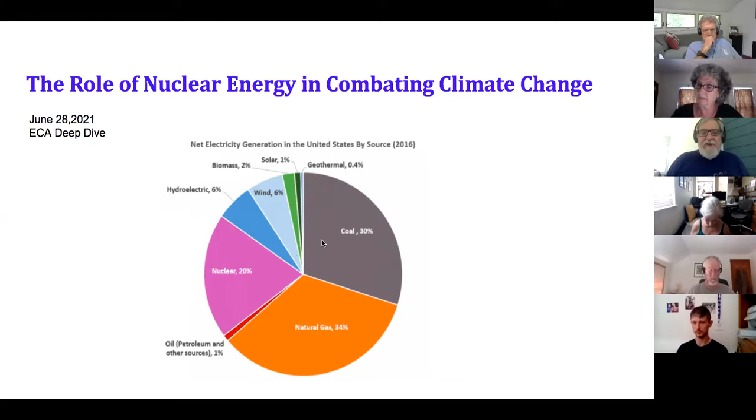At our last chapter meeting, Senator Barrett spoke to us. For those who don't know who he is, he's among the leaders and perhaps the leading climate advocate in the State House. He's introduced many bills, and he's also the chair of the Telecommunications, Utilities, and Energy Committee, so has a very influential role.

When he spoke to us, he said he had been anti-nuclear at one point, but that he's had a conversion. Basically he said it's because the climate goals are going to be incredibly hard, and there are going to be tough choices ahead to use every clean energy source we can get, and that we just can't afford to be purists. His experience is that when we shut Pilgrim down, it set us back a year. Well, it turns out it actually was worse than that, because we lost half our clean energy when Pilgrim got shut down, and we have not yet recovered from that.

Anyway, looking ahead, he thought we have to make sure we don't prematurely shut down Seabrook and Millstone, and then we have to be open to new technologies such as small modular reactors. So those are points we'll be talking on, and I thought it was a good intro that he gave us.

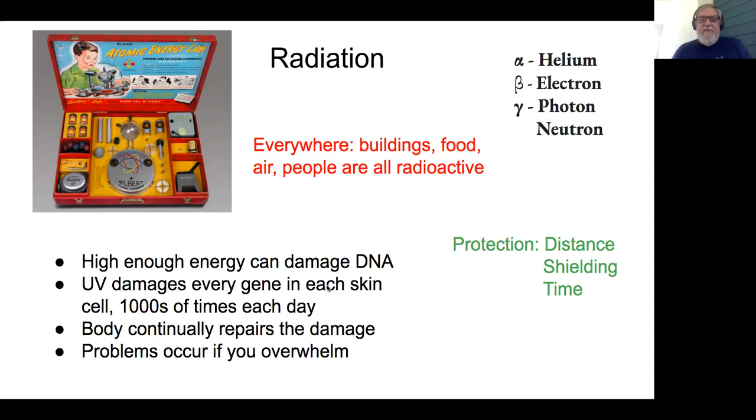So normally everything's okay, but if you've ever overloaded our system and gotten a sunburn, that's an example of what happens. So the problems are if you overwhelm the repair mechanisms, and it's the same with radioactivity as it is with UV light. You'll get a burn, you get more, you'll get things like moles, you get more, you'll get tumors, you get more, you'll end up with cancer. So it's deadly, but only in doses that are high enough to overcome our repair mechanisms.

So where's this radiation all coming from? Well, 84% of it is just naturally occurring, radon gas coming up. There's some from our food, some from cosmic rays, buildings give off radiation, and we get a lot of exposure from medical procedures—dental x-rays, CAT scans, things like that. If you add together all the things people are concerned about—nuclear testing, nuclear accidents like Chernobyl and Fukushima—you end up with just 0.3%.

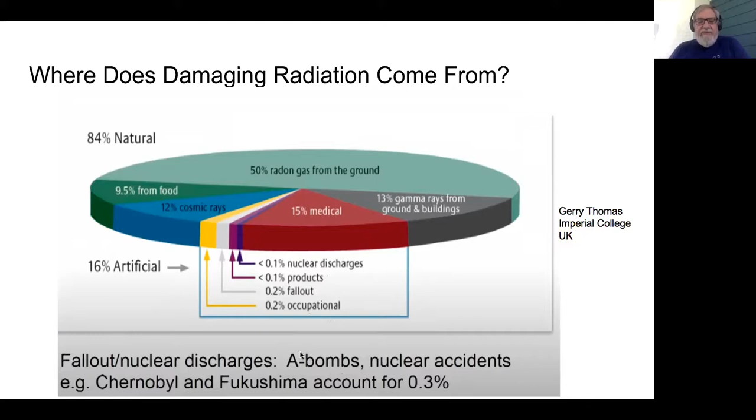So I want to talk a moment about dosing, because the dose is what's making it dangerous. It's like drugs in that respect. This is a log scale, so it's factors of 10 for each demarcation. The heights don't mean anything. And it says sieverts, which is a measure of lethality.

If we look at the responders to the Fukushima accident, they were a little under 1, and there was only one death, so that fit in also. As you get down to 0.1, we're getting to where the body is able to do repairs generally, and where the radiation dose is about what one would get in 1 year on the International Space Station. The effects on longevity—I put in here what the effects of living in Boston are because of PM 2.5. So we're in that range.

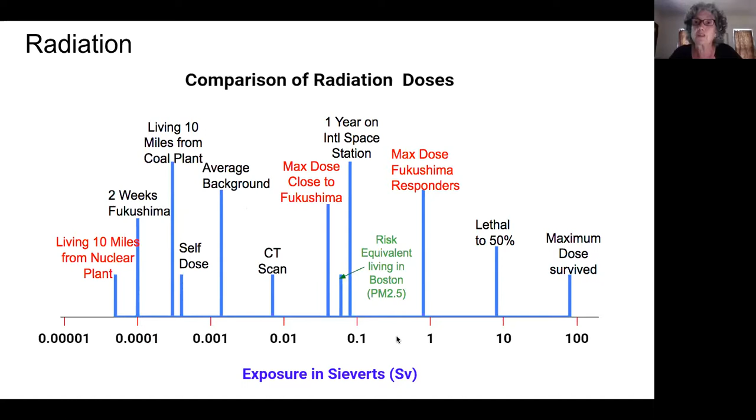What is PM 2.5? Those are small particles, usually from diesel emission, things like that. Even roads might put some up. Small particles in air pollution cause lung damage. Boston actually has very good air, but that is one of the things we do have, and we're actually right at the safe level. Those are the big killer from coal. We'll see in a moment that nuclear is not the killer; it's coal, and it's those small particles.

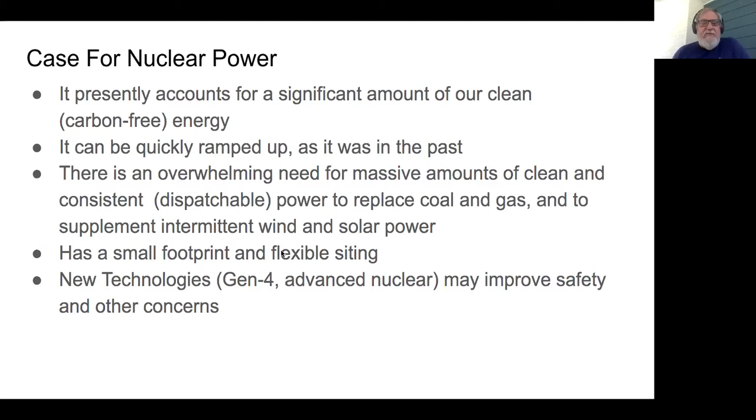Another of its advantages is it has a very small footprint and flexible siting, so I'll get into that. And then lastly, there are these new technologies referred to as Gen 4 advanced nuclear, and hopefully those will address the concerns that people continue to have. So anyway, my first point was that we're already using a lot of nuclear—it's already a big part of our clean energy portfolio. I'll say carbon-free and clean energy interchangeably.

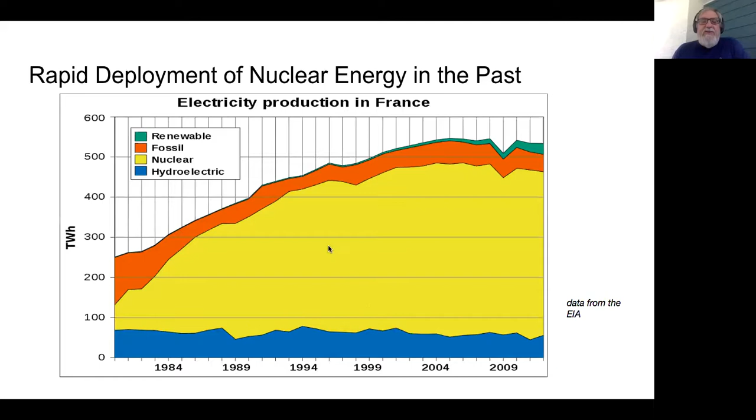Specifically, this is looking at France. France actually was a little bit later on that, so it was like 84 to 94, but the yellow shows the nuclear generation. You can see it just took basically a decade for France to very largely replace its fossil fuels.

And it's not just France, many other countries have done this. This graph shows it takes a decade of the peak scale up of different energies. We see Sweden was the biggest example in terms of scaling up nuclear very largely and very quickly, then France and 9 other countries, before we get to how quickly countries have been able to scale up the renewables, wind and solar. So historically, it's been nuclear, not the renewables, that countries have been able to largely replace fossil fuels with.

This data goes to 2014. I looked up more recent data, and the more recent increases in solar and wind are comparable to what's shown here, on the order of 80 to 150 kilowatt hours per capita. So as much as we're hoping for wind and solar, it's not happening at the speed at which in the past we've been able to do nuclear. So that's one argument: historically, when we've needed or there was desire to replace fossil fuels, we were able to do it with nuclear.

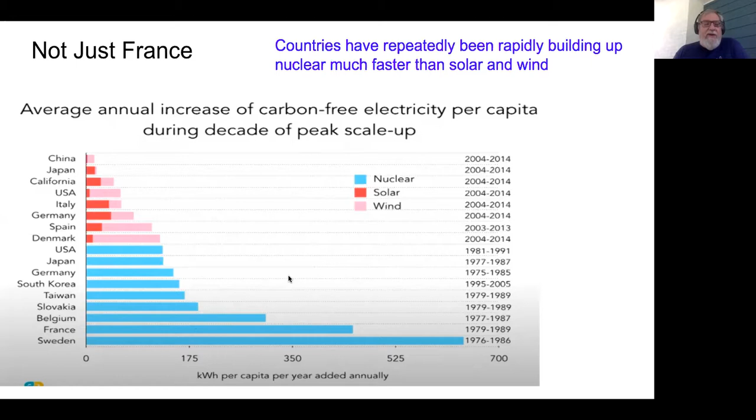The hope to combine the renewables with batteries requires storage for each of these time periods. The minutes and hours we can handle right now with batteries and other things like perhaps pumped hydro. We can probably get up to days, but there really doesn't seem to be anything on the horizon that looks affordable for the longer periods of time.

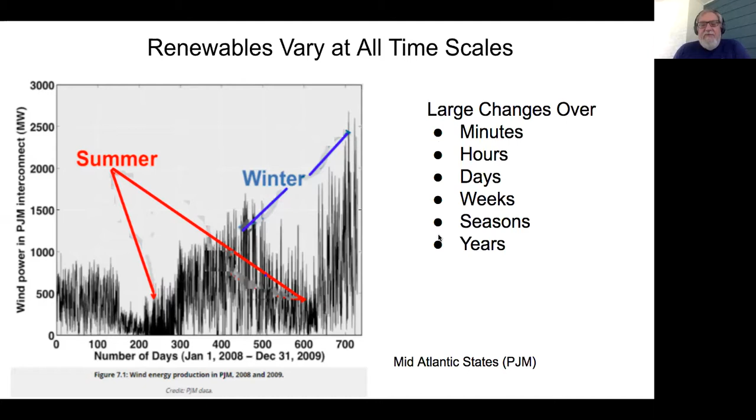If we look at electrical energy generation, it involves 3 different classes. There are the renewables, and their big strength is that the costs have been coming down, so that's an advantage. But as I just showed you, you can't depend on them. They may not be there—they come and go, and the amount varies.

The next category is what's known as flexible baseload. This is energy that can be just turned on when you need it. It's there, you can depend on it. You can vary it, tune it up, tune it down, and it's consistent. There are several terms for this: firm energy, dispatchable energy, baseload energy. The point is you can just turn it on and modulate it, tune it up and down—it's steady and dependable. That's why baseload is used for a reason; it's the base of our energy.

The third is the fast burst, and that's to make up for the way the load changes and makes up for the variations in renewables. That is mostly peaker plants, although batteries and other things can make it up. But the more we're dependent on or the more we use renewables, it's been lately the experience that the more fast burst is needed, and most of the fast burst has been gas peakers.

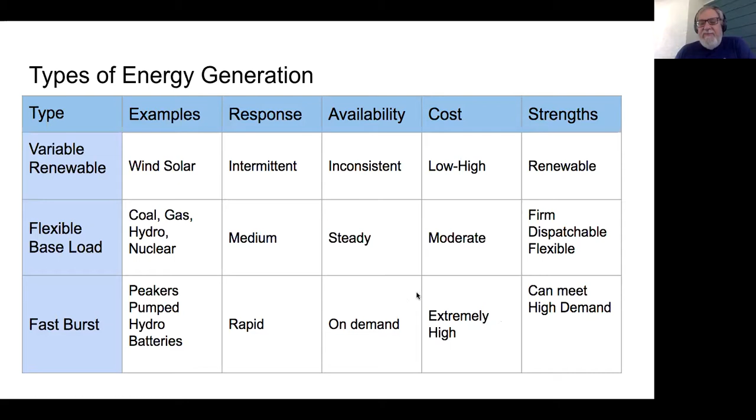So this is probably the second main argument. The first, I thought, is the rapid adaptation you can do with nuclear, but the second is this replacing the role of fossil fuels as dispatchable firm energy.

We can look at two countries. Yep, well we're at about 10. Okay, thank you. We can look at two countries.

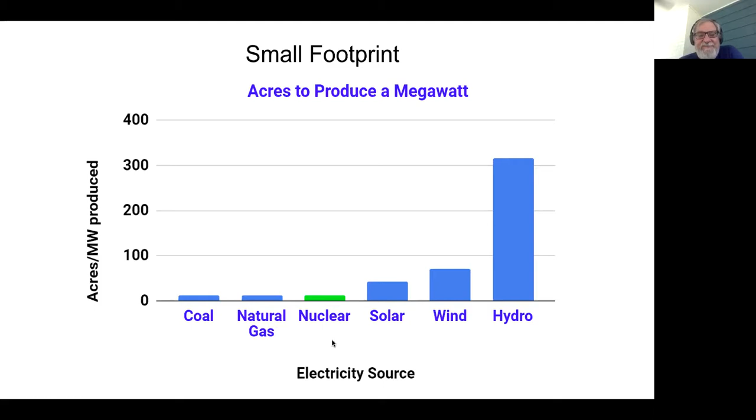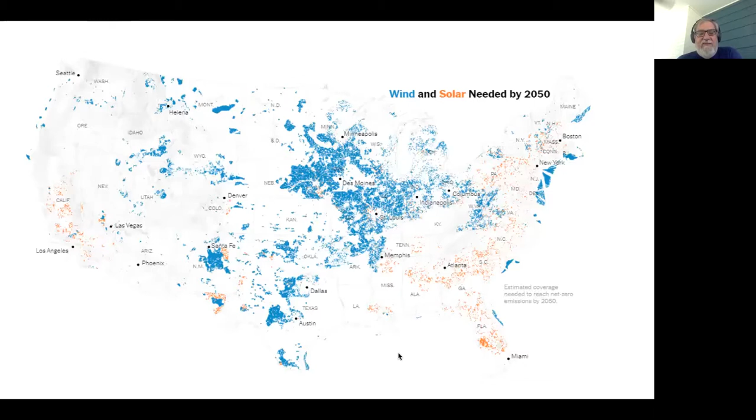And the last point in nuclear's favor, probably surprising to at least some people, is that it actually has the best safety record.

One reason is a lot of deaths come from mining. Nuclear has about a million-fold higher energy density, so there's not much mining, not much transportation - another place where deaths can occur. Because people are so very worried about nuclear, there's excessive safety involved in it. Put it all together, and it has the best safety record.

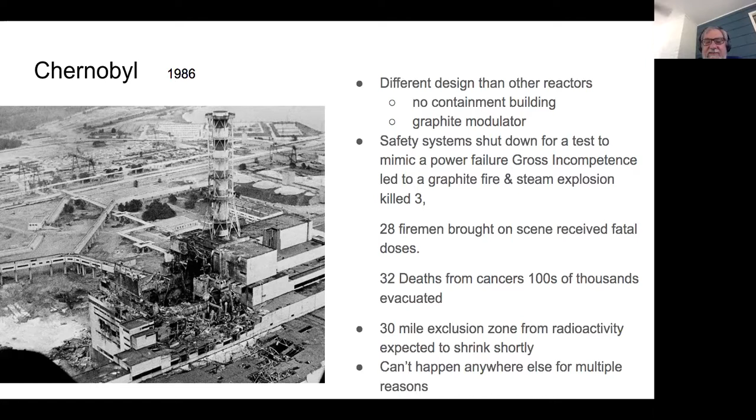I'll say a bit about Fukushima. The 4th largest earthquake ever on record, magnitude 9, a gigantic one, and then an enormous tsunami that wiped out entire towns, including the town of Fukushima. And yet the reactor was still standing.

There were backups, and when it lost grid power, there was battery power and diesel power, made to last for a week. It was thought the grid would come up by then, but it didn't. Eventually there were problems, and a few workers were sent in and got a moderate dose, and one of them has since died of cancer.

A lot of people died from nursing homes, people from intensive care units, from ERs were moved without drugs and oxygen. Neighboring towns would refuse to let these people in because they didn't want to catch the radioactivity, so they died of exposure, having to sleep outside in the winter. So the deaths came from the evacuation. There was only one death from the actual accident.

Since then, there were changes to reactors so that neither power nor human intervention is required to shut down a reactor - they'll shut down on their own, passive safety.

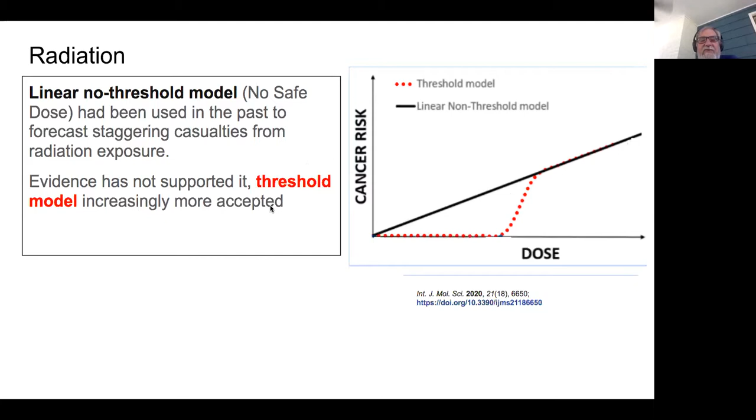This is related to that - it turns out that people evacuated from Chernobyl suffered more ill health than those who refused to evacuate and just stayed where they were. If you calculate the change in life expectancy, staying near Chernobyl, you may have lost 2 months life expectancy from the radioactivity. But if you're moved to Kiev, you lost 9 months from fossil fuel pollution. And it's not just Kiev - cities have a fossil fuel pollution cost to living in them.

So anyway, just to give some perspective there.

I forgot where it was. I was going to break for a question. Yeah, we'll talk about waste too.

So what about waste? Well, I already showed you that a coal plant gives you more radioactive waste in the environment than a nuclear power plant. But solar and wind have their waste issues too. That said, because of the radioactivity, people are concerned about nuclear waste.

One thing you should know is that most of it decays within the first few decades, about 30 years. So generally nuclear fuel is just stored on site for about 30 years, and you let most of that radiation decay away. But some of it is very long-lived, and there are 3 approaches that countries take: they can bury it, recycle or reprocess it, or just leave it on site and monitor it.

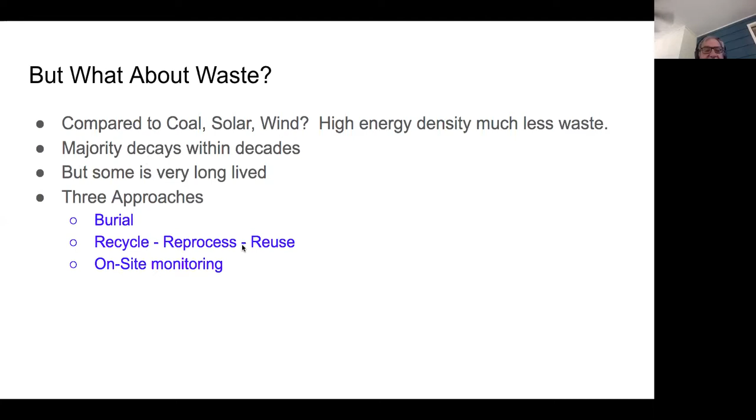Finland is an example of burial. There's a nuclear power plant right next to this extensive underground network still being built. You pack away your excess fuel in canisters, they're sealed, then put inside another canister, and that's all buried and covered over. Once you fill up a row, you close off that row. It's a stable area, and it's thought it could last indefinitely there, or long enough.

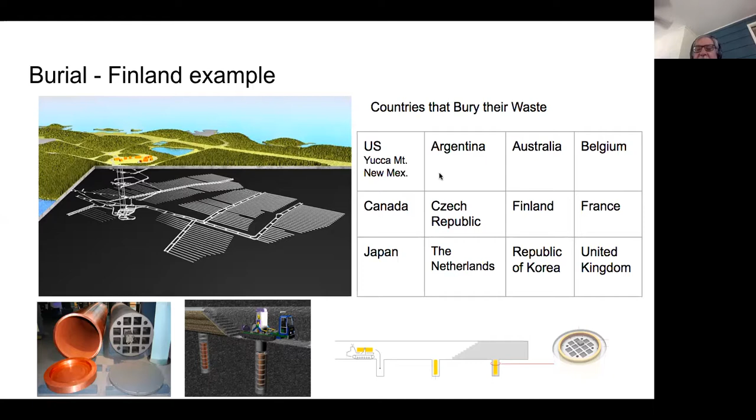Many countries take this approach and bury it. The US set up Yucca Mountain to do that, and for political reasons that hasn't happened, but we do bury nuclear waste. There's a site in New Mexico we don't talk about because only the Navy is allowed to use it. So the Navy buries nuclear waste, but no one else is allowed to. But many countries take this approach.

I'll contrast that. It turns out there are natural reactors, in Gabon. There are places where uranium has a concentration of U-235 that, when it gets wet—because you need that water moderator to keep the reaction going—when it rains, water gets into the site and nuclear reactions occur, becoming natural reactors until they heat up and boil off the water and the reaction comes to a halt. That cycle has gone on for millions of years.

The uranium level is now low enough that the reactions have come to a halt, but the waste is still there. People looked and said, well, how much has that moved? What's happened with this buried waste? And nothing—it's basically right where it's always been, nothing's happened over millions of years.

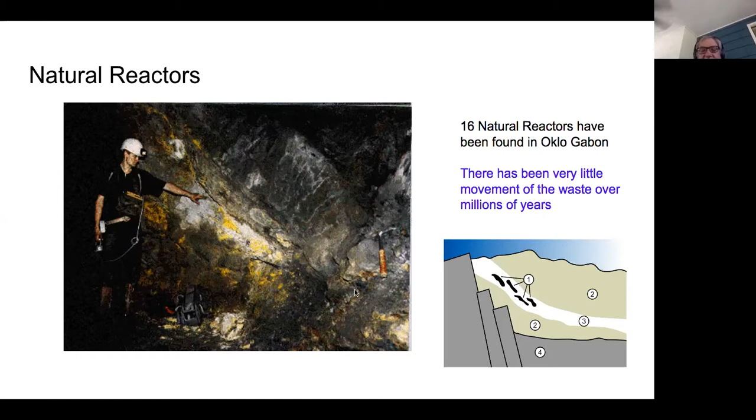So there's that. Anyway, there's the French example. A good part of the nuclear fuel is still unused after you go through the reaction, and you can reuse it. There's breeder reactors, and you can go through several cycles and get a lot more use out of your fuel, which significantly cuts down on waste. You also end up using a lot less fuel.

The problem is that uranium is very cheap, so most countries just find it easier to buy more uranium rather than reprocess what they have. It's a complicated chemical process to do the reprocessing, so most just say, oh, we'll use it and we'll bury it.

But there are countries that reprocess, and the US actually does this in terms of our weapons—we reprocess the nuclear materials in those. The French feel it's more responsible. They say, well, higher cost, okay, but it's more responsible. You don't have to rely on any more mining, you're generating less waste, and that's worth the cost. As we saw, French electricity is cheap.

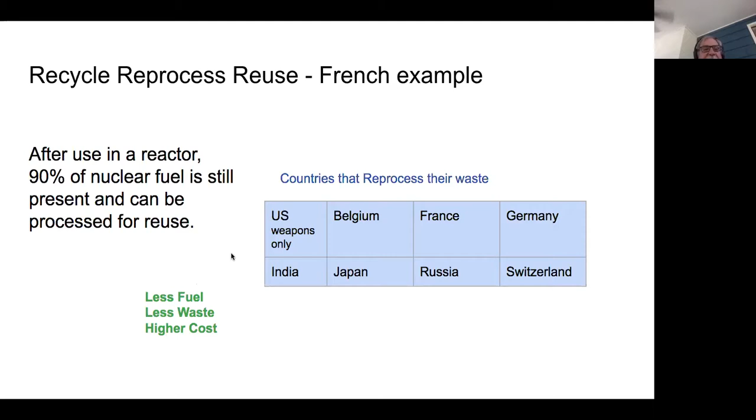But many people think what makes the most sense is what we do in the US, which is just keep it on site where you keep an eye on it. The radiation is decreasing with time. You put it in canisters similar to the ones being buried in Finland, and then you put those inside these big casks.

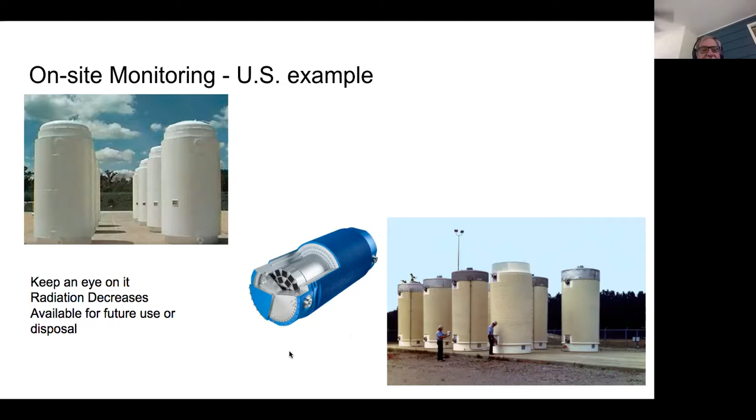You see people standing next to it—there's no radiation coming out of it. It's properly shielded. You can crash a plane into these; they're made the same as the bunkers for nuclear missiles, so they're considered pretty indestructible. So we'll end there, back to questions.

So 3 people put in the stack—this was pretty early in this section. Alan Fierce was the first. Hey Alan. Hi Paul, maybe I jumped in too quickly—I thought you were going to get into some of the advanced nuclear reactors. But that's the next section. All right, then I'm going to hold my question. Okay.

Does it involve the Union of Concerned Scientists? Yes, it does, actually. Ah, okay, I had a feeling. That's their new report? Yeah, yeah.

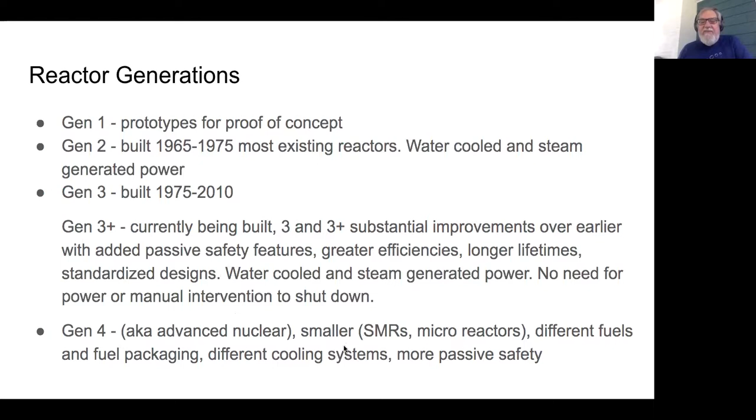They're designed, as I said earlier, so there's no need for power or any manual intervention to shut them down - they're considered passively safe. The problems of the accidents before are thought to be impossible. But then there's this new thing, Gen 4, the advanced reactors - those are the smaller ones, SMRs, small modular reactors, microreactors, experimenting with different fuels, different ways of packaging the fuels, different cooling systems, and more advanced passive safety. I'll look at a couple of those to give you a sense.

So here we are - small modular, very small modular microreactors. They get as small as, here's the reactor here - it's just a little bit bigger than a person. You don't need a containment building, they're air cooled, you can fit it on the back of a truck. The idea is you mass produce these, and that's where the cost savings comes in, and you can send these to remote areas.

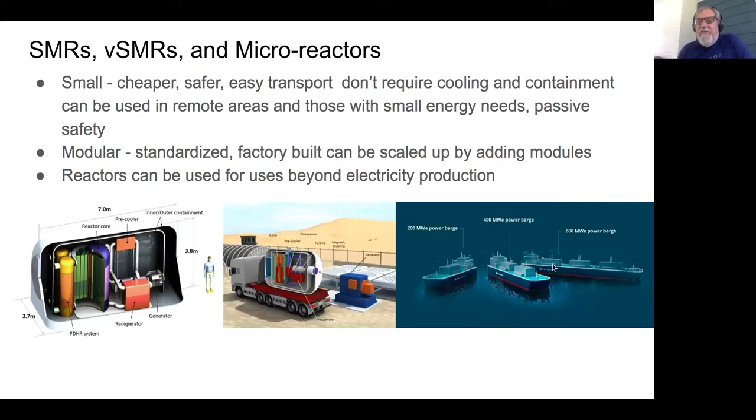The Army is very interested in these - they like the idea of a reactor you can just send to a base and electrify your base the next day, no matter where it is, remote places, and you can just add more as needed - use 2 or 3 or 4. They don't need water for siting, so you could really put them anywhere. There's a Danish company, I just saw this the other day, they're putting them on boats they just started building - the idea is to send these boats around the world to help electrify cities, again using these same modular reactors.

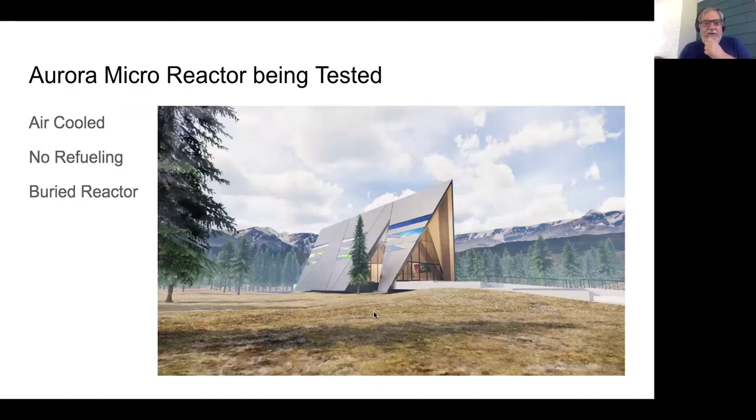I want to go into a little more detail on this one. The Department of Energy had a competition, and the XE-100 won it - X-Energy is the company. It's a helium cooled, pebble bed reactor.

It's called TRISO fuel. There's a fuel pellet, smaller than a grain of rice, half a millimeter - just barely bigger than a grain of salt. That's embedded in multiple layers - some spongy, some super hard ceramics like silicon carbide, some heat proof - to protect against anything you can imagine, with a layer to protect against each type of damage. The spongy ones let it take being smashed. These are about the size of BBs, and then they're packed together into something closer to billiard ball size.

And that's your pebble. And then the reactor, you just add your pebbles, and with time, they're removed from the bottom and you add fresh ones at the top. And so there's never a need to stop the reactor for refueling. You just keep adding. There's no worry about a meltdown.

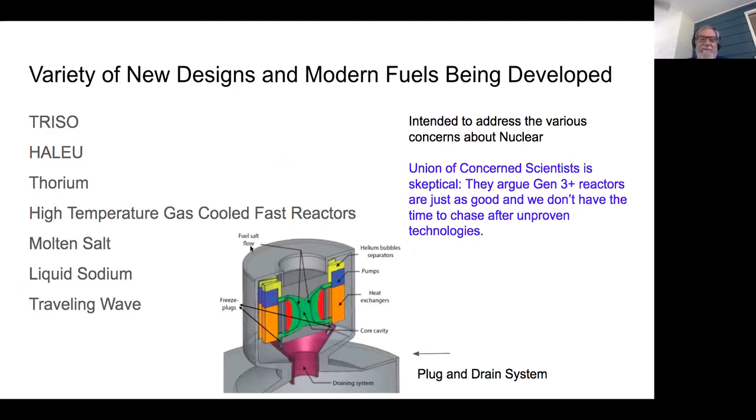But if you start doing the math, you realize you'd need to steal 30,000 pebbles. So to me, I'm not sure that was a reasonable kind of argument to come out against the pebble bed reactor, but that's the kind of arguments they were using. I was actually surprised because it was their belief in Gen 3+ reactors more than what I'd consider many picky assaults on the different Gen 4s, once one reads the report.

So the last thing I want to talk about is what's happened when plants have been closed. In Japan, they started building coal plants to replace the nuclear plants they shut down. Although this week, for the first time, they've reopened one of their nuclear plants, so they may be rethinking their decision. Germany has been getting rid of their nuclear plants and replaced it with electricity from Poland, which is coal-based. And so it's set them back.

Massachusetts, we talked about when Pilgrim got shut, it set us back. New York, because of concerns like Alan mentioned about having plants near populated areas, has shut down the Indian Point plants, both of them. This is after one of them closed, and what happened is renewables increased a tiny bit, nuclear took a big hit, and it was replaced with fossil fuels. And that's generally been the story: when we've shut down nuclear power, it has not been renewables that have helped us, but fossil fuels that have benefited.

I guess the last thing here, what's stopping us from a big buildup? Well, fear, cost was mentioned, the politics, will, distrust, and just a general perfectionism, right? Don't let the perfect be the enemy of the good. And we keep holding nuclear to a very high standard.